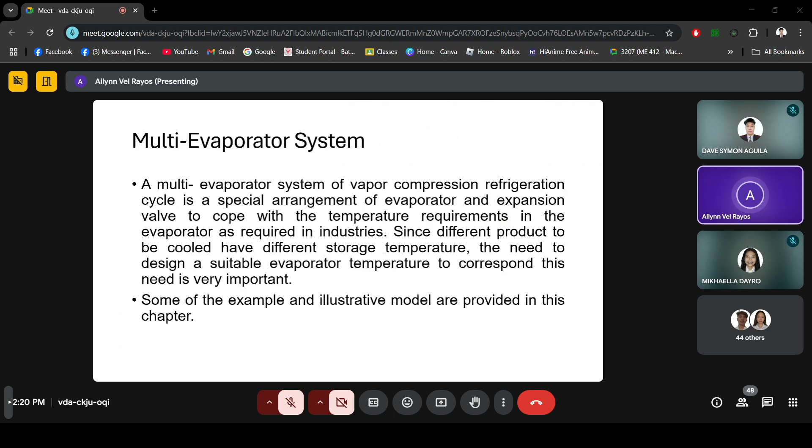Some examples and illustrative models are provided in this chapter. First, we have an example of two evaporators with parallel expansion valve arrangement and with a desuperheater. As you can see, this is state point 6 to 7, and from superheated it becomes saturated vapor. So the desuperheater lowers the temperature down to its saturation temperature, from 6 to 7.

In the system diagram, state point 1 is the outlet of the condenser. Then we have extracted mass from 1 to 2, and the other goes to 3 toward the expansion valve.

From 3 to 4 it undergoes an expansion process before going to evaporator 1, which has a refrigerating capacity of 260 kilowatts, and the other refrigerant goes to the second evaporator, with a refrigerating capacity of 250 kilowatts, to be maintained at negative 10 degrees Celsius. The refrigerant at the outlet of the evaporator goes to the first stage compression, then the desuperheater, then the junction at state point 7 with both refrigerants from the evaporators. So the total mass enters the compressor, and process 7 to 8 is the second stage compression.

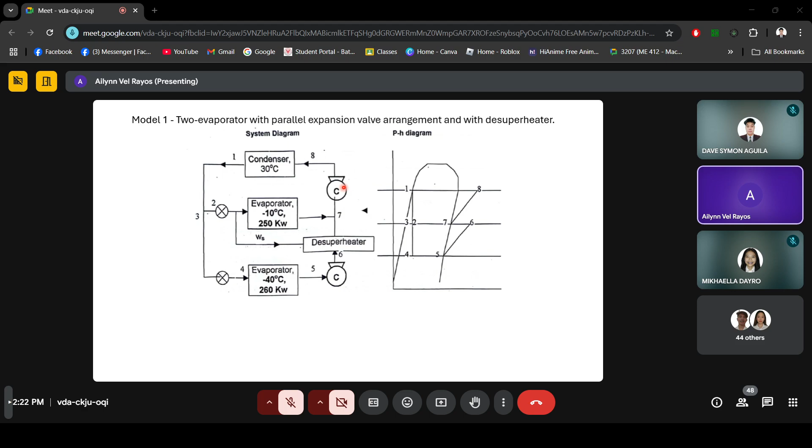The desuperheater lowers or controls the temperature of superheated steam by injecting a calculated amount of water droplets into the flow stream. So the refrigerant extracted here is used to desuperheat the superheated vapor at the outlet of the first stage compression. In this type of system, it is important to provide the correct mass balance in each system component or process line, so you should have the correct labeling for mass balancing within the system diagram.

We let M1 be the mass at the first evaporator and M2 the mass at the second evaporator. Entering the desuperheater, we have the combination with WS, the amount of water droplets in the flow stream, so leaving the desuperheater is M1 plus WS. Then at the junction we have M1 plus M2 plus WS, which is also what leaves the condenser. Then M2 plus WS is extracted, and M1 remains going to the first stage evaporator.

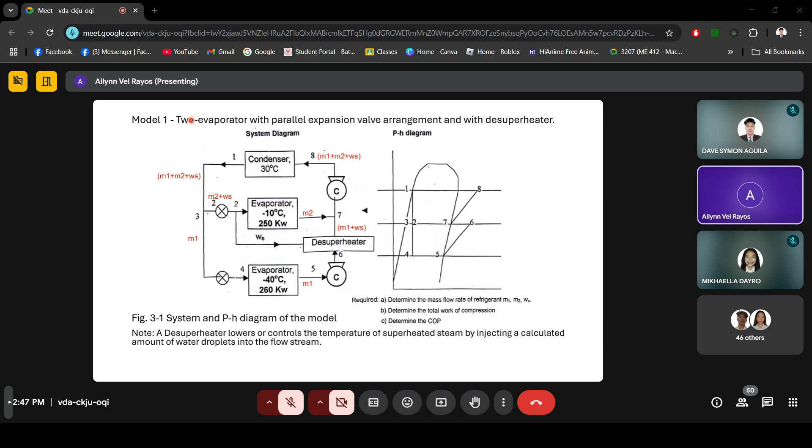Okay, let's just discuss this. So, tingnan nyo na lang kung tama din yung values na nakuha nyo dun sa mga superheated state points natin. So again, this is our system and pH diagram of the model. And then I ask you to get all the enthalpies at different sections of the system. So H1, 2, and 3, as you can see, it all undergoes just an expansion process. So lahat naman yan is isenthalpic, constant enthalpy.

So HF at 30 degrees Celsius, which is equal to 236.664. Okay, and then for H5, we have Hg at negative 40, which is 388.609. H6 natin is superheated. Ang property na titingnan natin dito is the entropy at state point 5 that we obtained, and the pressure at negative 10, PSAT at negative 10 degrees Celsius. And we will obtain 417.5 or kung ano mang pasok sa tolerance natin dito.

And then H7, we have Hg at negative 10 degrees Celsius, and that is 401.55 kilojoule per kilogram. And H8 natin is enthalpy at entropy 7, which is equal to S8. And then yung pressure natin is PSAT at 30 degrees Celsius, which is 433. So we are asked to determine the mass flow rate of refrigerant M1, M2, and WS. And then we also are going to determine the total work of compression, and we'll also be determining the COP.

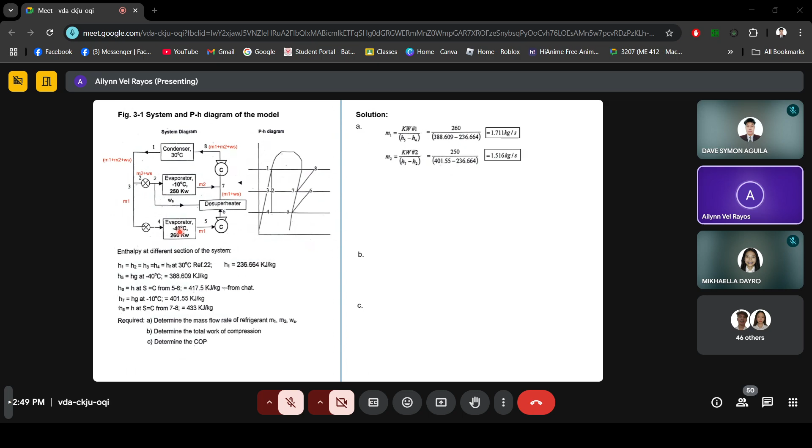So for us to get M1, yun yung refrigerant na nandito sa first evaporator natin, to be maintained at negative 40 and refrigerating capacity is 260 kilowatt. So 260 divided by the change of enthalpy, and that will give us 1.711 kilogram per second. So for M2 naman, that is 250 divided by the change of enthalpy, which will give us 1.516 kilogram per second. So for WS, as you can see, it can be obtained using energy balance at the desuperheater.

So energy in is equal to energy out. So going into the system is WS H2 plus M1 H6. And then equate it to the quantity of WS plus M1 multiplied by H7. And WS is equivalent to 0.1655 kilogram per second. So we already obtained all the required values for letter A.

And now we'll be determining the total work of compression. Since we have two compressors dito, then we'll obtain two works and then add it. So you have to be cautious on the mass flow rate that you will be using. So kung ano yung pumasok dun sa compressor, yun yung mass na i-multiply mo. So sa first compressor natin, M1 times H6 minus H5, and then total mass naman yung nandoon sa second stage of compression natin. So M1 plus M2 plus WS times the change of enthalpy. Okay, and this will give us a total work of compression which is equal to 156.12 kilowatt.

And then for COP natin, total of the refrigerating capacity divided by the work of compression. Total natin is 250 plus 260 divided by 156.12, and that will give us 3.27. Okay. Do you have any question regarding this problem? Okay. Pa-react ulit kung okay na tong problem na to. Malinaw ba?

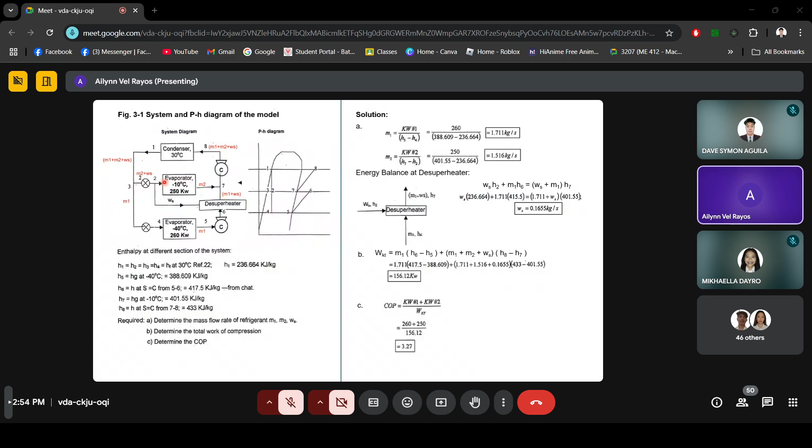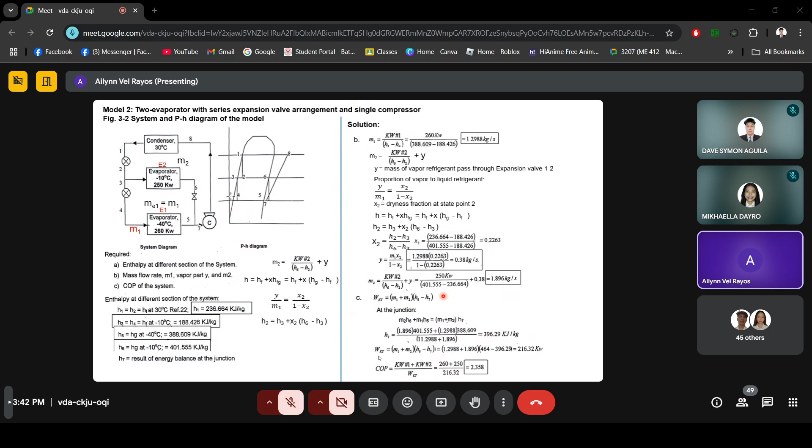Okay. So for H8, we have 464 yung nakuha natin na value. So this is an example of multi-evaporator. So nadagdagan lang tayo ng isa pang level, but the way on how you're going to solve this is the same. So meron tayo ditong complete. Discuss ko lang kung how we obtained and label mass na nandito.

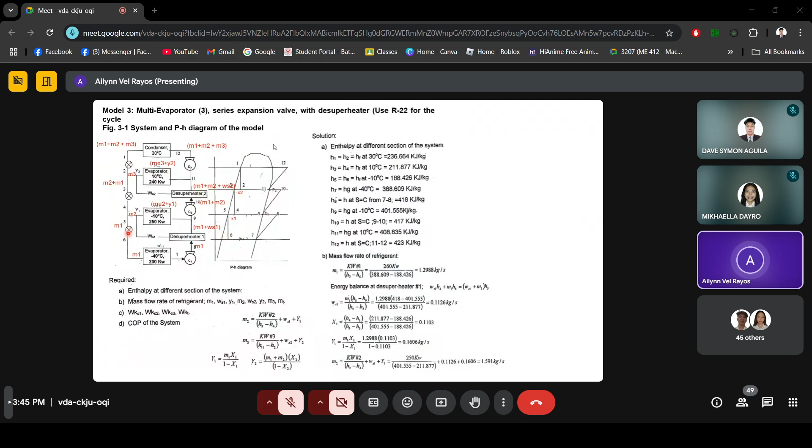And this is already a solved problem. Nadagdagan lang tayo ng isa pang stage dito. But yung process of solving dito is just the same. Okay? So you will do problem 2 and 3, which is again part of the problem set that you will be solving for this week, and then it will be submitted on Friday or before our meet next week.

Okay, any question? So I'll give you time today. So if meron kayong question about your design project, you can ask it here in the in-call messages, or we can discuss it through this Google Meet. So kung may tanong kayo, tanong nyo lang dito sa in-call messages, and then I will give you time for each group to consult. But if you don't have questions, you can continue solving problem set 2 and 3.